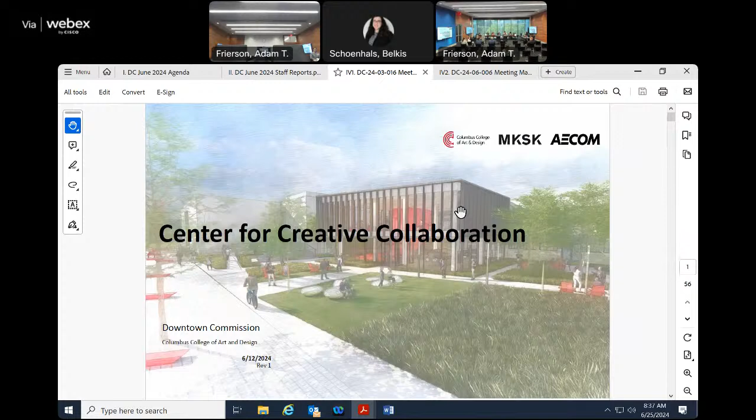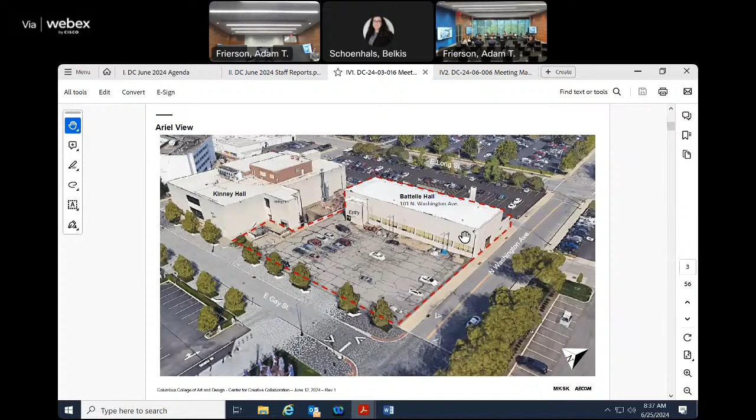And this is essentially what you all saw in March. We do have some new members here, so I'll orient everyone to the site and then I'll leave the applicant to go through the materials. But this is Battelle Hall here, and a parking lot to the south. So they're going to restore some of the exterior here, expose the windows that are behind here, and then add on the expansion, which we'll see.

This is the site again, and then you see here the building expansion and the footprint of the existing building, and then the gardens and other programming that will take place. And I'll leave that to the rest.

The downtown design guidelines state that downtown's built environment continue to be enhanced and energized with new buildings and additions to existing structures that promote good design, long-lasting building construction materials, and attention to detail, especially at the street level. The guidelines encourage adaptive reuse of existing buildings and recommend that new construction be influenced by the pattern of nearby contributing buildings. They also recommend high-quality materials, ground floor transparency, lighting that minimizes uplighting, and the inclusion of landscaping and plaza space. As such, the proposal is consistent with the recommendations of the downtown design guidelines.

Belkis, I'm going to recuse here. All right, thank you, Jen.

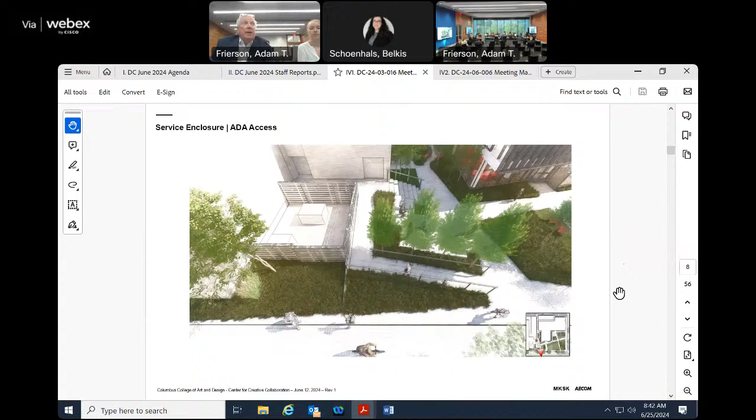You can see in this image the utility court next to Kinney Hall that we're screening off. That has periodic access—sliding gates to give access from Gay Street. That is the background for an accessible ramp, and also an outdoor gathering and study area that you can see better in this view.

Gay Street and the campus as a whole is top left of this image, looking to the west. This is outdoor gathering space for students, for instruction, for casual gathering, and it's exposed as well to Washington and Gay. It's important to us that we expose this entire facility, indoor and outdoor, the production of art and the collaboration of art, to the outside world. This is the edge of our campus.

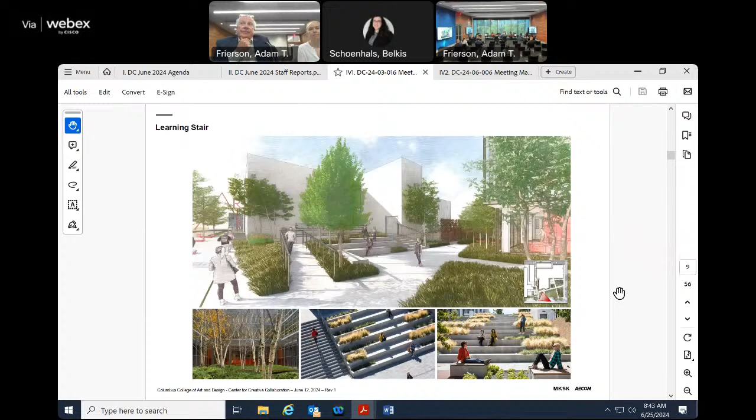A question - with the exception of the new entrance, is there anything being done to Kinney Hall facade wise, or is it just that? It's not on the exterior. Just that new pathway, got it.

This is an image of the connecting walk that runs north to south, leading from the body of the campus and this new yard space to the north, through what will be a future parking lot renovation and a transit stop on Long Street. Our students, faculty, and staff will be able to directly access the campus through this connective walkway, and there's also an opportunity for a small respite study space.

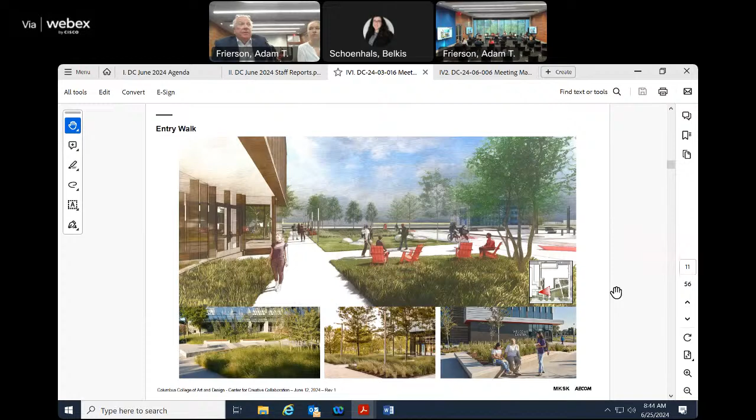This is the front yard of the building. Again, we're using a native plant palette. This is not meant to be unkept, but it's not meant to be a manicured landscape either. We want to make sure this is properly installed culturally.

This is virtually the only mown lawn in the whole project, and that's an extension of this outdoor gathering space where students and visitors can gather casually. The furnishings will be provided by the college as we finish the renovation work.

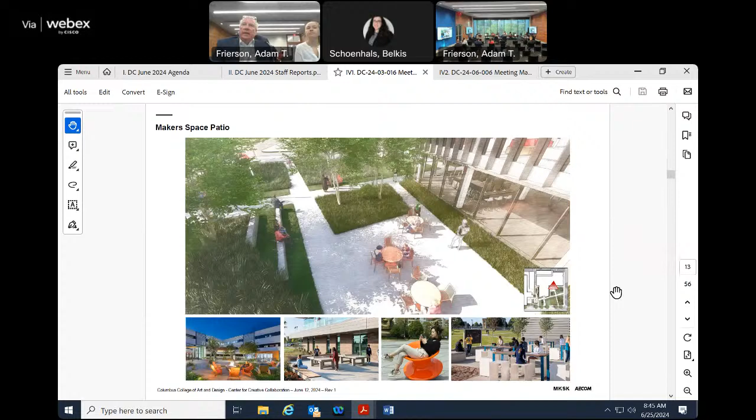And then this is the outdoor makerspace, as we call it - a casual collaboration gathering space for students. It's accessible, yet somewhat protected from Washington Avenue and passing automobiles. The whole intent is indoor function of the building, outdoor function of the facility, and it is truly indoor, outdoor, and exposed to the outside world.

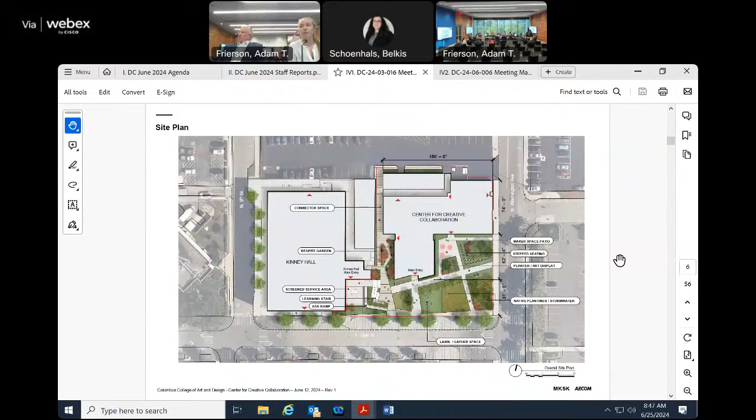We did do some destructive testing to explore the integrity of the open brick. It was determined to be cost prohibitive to really pull that off. We worked with our construction manager partner to do some destructive testing there, and given the state the brick was in, we realized that was probably why they covered it up.

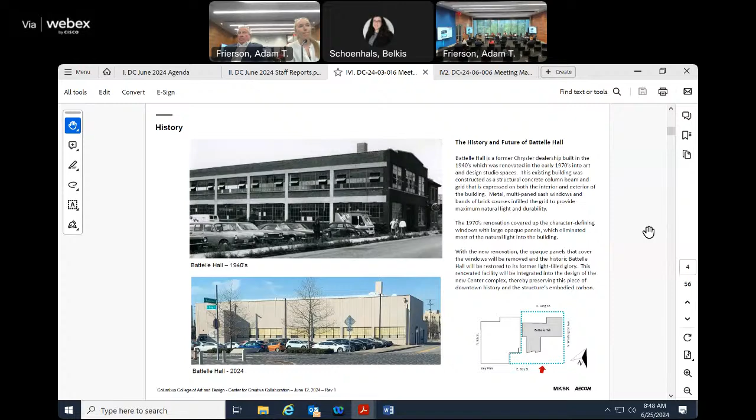So will it look like brick, or will you see the brick texture underneath, or will it end up a smooth surface? It'll be a smooth surface, similar to how it is today, a plaster finish.

So the intent is really to keep most of the plaster, which is in pretty good condition. There are some areas with degradation from water infiltration, so we'll repair those areas and put a new coating on. And what about the roof, will that be...?

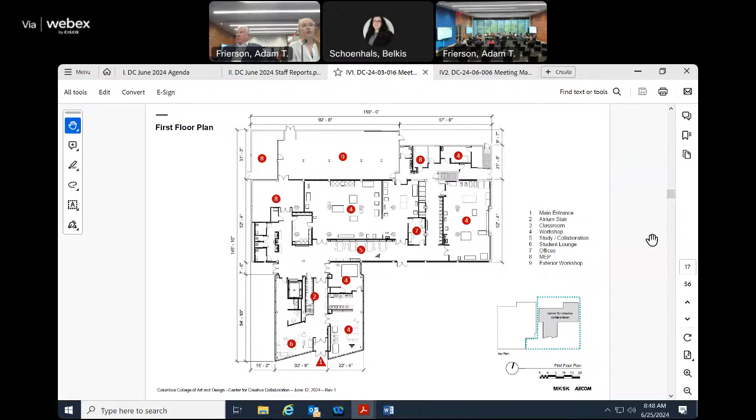I mean, you can't necessarily see it from the street. Will it be white? It's a white roof, yeah. It'll stay - it's an existing roof that's still under warranty, so we're keeping the existing roof in place and coordinating with the installer.

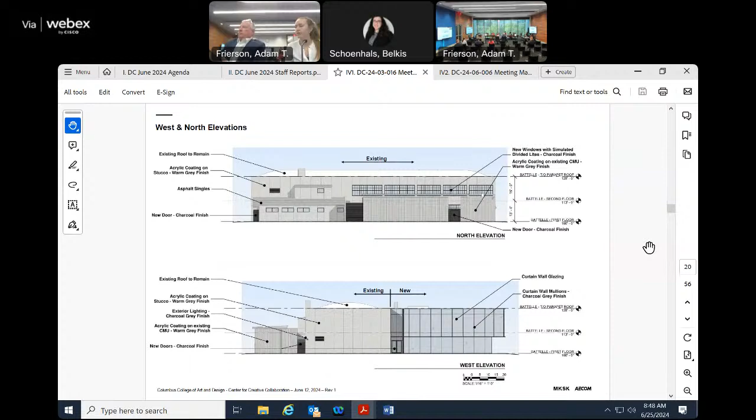Clear glass? Yes, it's called low-iron - essentially clear glass with a very minor tint to help improve performance and solar heat gain. Will that be on the new section as well as the old? Correct, all of it.

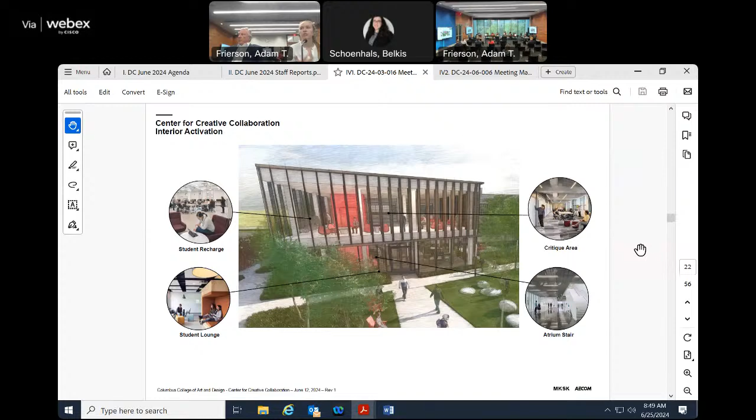If we could go to the renderings. So that will be on the curtain wall glazing - the charcoal finish is the same color of the mullions on the new addition as it will be for the existing building. All the doors will be aluminum storefront matching that same charcoal finish. A pretty simple material palette, really just working to integrate the new and the old while allowing some juxtaposition of the overall design and character.

I think the rest was just all the extra stuff. Okay, but Brian, can you give us a couple minutes on what the plant selection is? Sure, I want to find out which swamp there, so.

It's better known as the stormwater management area - I've been saying swale, but I appreciate your shortcut, Steve. The bottom of this basin is meant to be virtually a monoculture of grasses.

This is all nursery stock, but all native species in terms of origin. The largest trees we have are white spire birches, white bark birches. We've got small maple and sawtooth oak, given their environment. Those likely aren't going to be massive trees over time, but we're looking to create that soft ground cover feel, yet have some height to it.

So it isn't an ivy bed - it has some height, and it's hardy enough to go underwater as I mentioned before, but it's also hardy enough to withstand the drought conditions that those dry basins have once they dry out. That's really the tougher environment for plants - the dry basins by nature. Yeah, so those all do very well in terms of drought tolerance.

We want to lean toward environmental correctness in terms of hardiness zone and origin, where these plants ultimately come from in nature. People don't realize, but bald cypress is an Ohio native species. Yes, indeed, it's a beautiful tree - you don't see many of them.

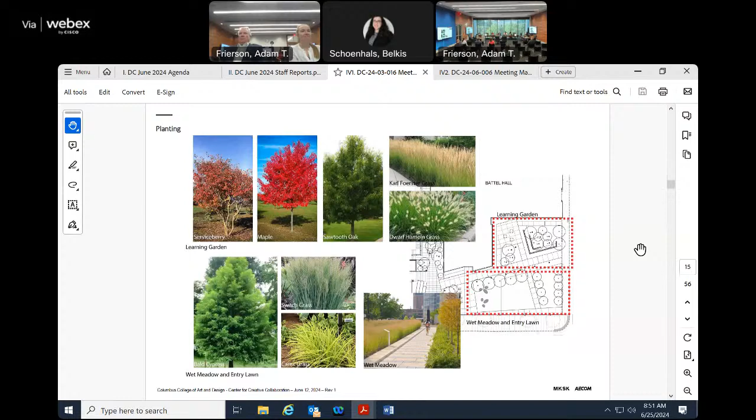I'm not trying to monopolize the conversation - anybody else have a question or comment? I have a couple of comments. I love what you've done, it's beautiful, and I just had a question.

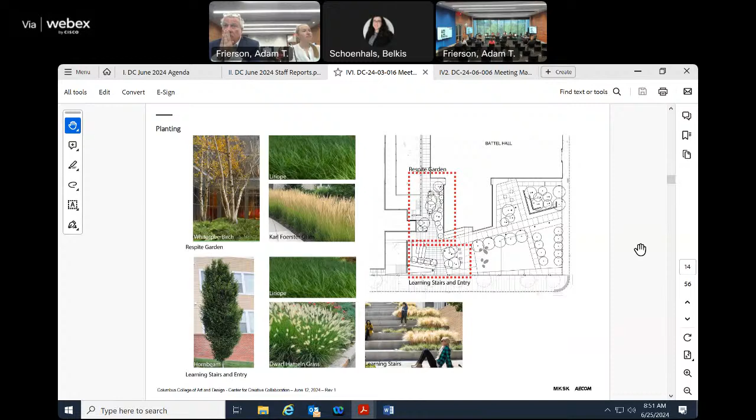The green space you're creating in the front - you talked about wanting a connection between the two. I'm wondering if you've thought about the winter months or when it's dark out. You're creating these nice sculptural site pieces that look like rocks for sitting - have you thought of lighting or other techniques so that when it's dark or gray out and you're not really using that space outside, it still seems activated and engaging?

Is the slide in here, Belkis, with some of the exterior lighting? Yeah, we do have a lighting slide, just after the planting slide I believe. There you go - Jane, great comment. We've got two large cluster columns which are meant to do that area lighting.

That may speak largely to your point, where we can aim those spots from a single pole on the seating area to the west, and also areas within that collaboration courtyard. So we can accent with aimed light on specific features - trees, furniture, hardscape, whatever we choose. But that's also meant to be area lighting for outdoor events, so those are adjustable and dimmable.

In the magenta color are a series of column lights which accentuate that crossing path that gets from the body of campus to the edge of campus. And then we also have low down lights which light that connecting walkway from Gay Street that goes to Long - about the north-south corridor.

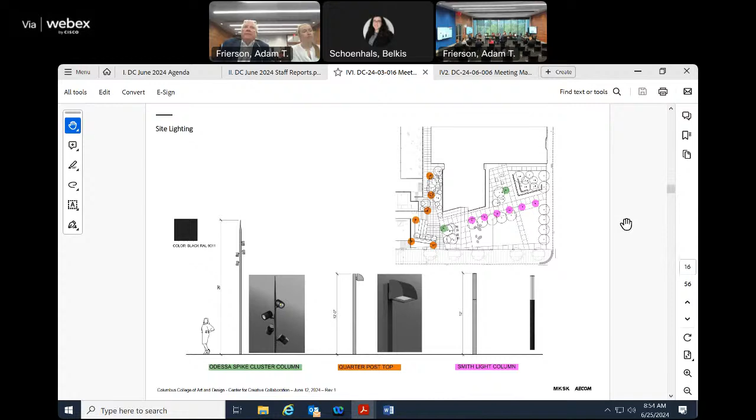That was the other question - as that corridor going north and south becomes narrower, do you have lighting there as well? We do. One of those images shows a green screen, which is a modestly elevated wall with the utility court behind it, and we're extending that with a green screen so that it's a comfortable and attractive walkway. It'll be lit further to the north. That all sounds good, thank you.

What's your pavement material, by the way? Cast in place concrete, buff wash and scored concrete, and probably light broom finish as well. Are there other questions? What's the pleasure of the group then, please?

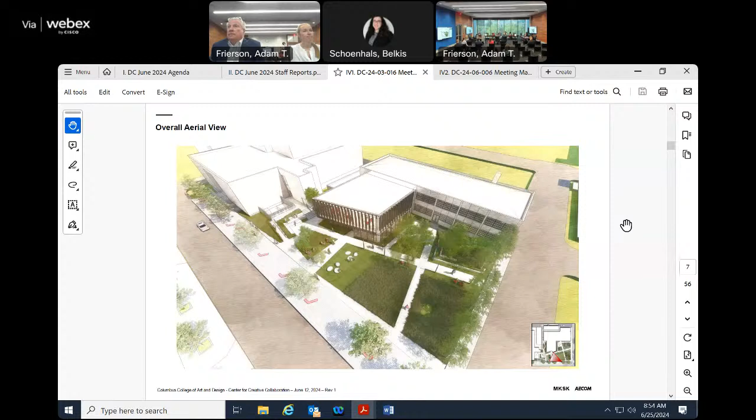Anyone want to make a motion to approve? Put it on the table? If no one has anything else, there was one more thing I wanted to. Okay, I'm sorry, go ahead.

I had touched on this a little at the last meeting, but on that eastern facade where you have what looks like a garage door or service door, it looks like Boone Street or Boone Alley terminates there. I'm wondering if you've thought about pedestrians or vehicles traveling west on that street, and whether that area could be designed somehow - maybe that garage door could be a different color, or the stucco finish on the existing building could have a change in texture or a subtle pattern - something so it doesn't just look like a back door, since it could be a prominent facade because of pedestrian traffic and its place on campus.

That's actually a great comment, and I think you may have read our minds. The campus is also planning to undertake an overall branding and wayfinding study. We've discussed this building and how the north side as well as the east side seem somewhat like the back door because of where the new addition is, but those facades are also very important. So the college has elected to defer any work on that as part of this project and incorporate it into the overall campus branding study, so they can take a comprehensive look at their whole portfolio and take an approach at that time. So yes, they were thinking exactly the same thing.

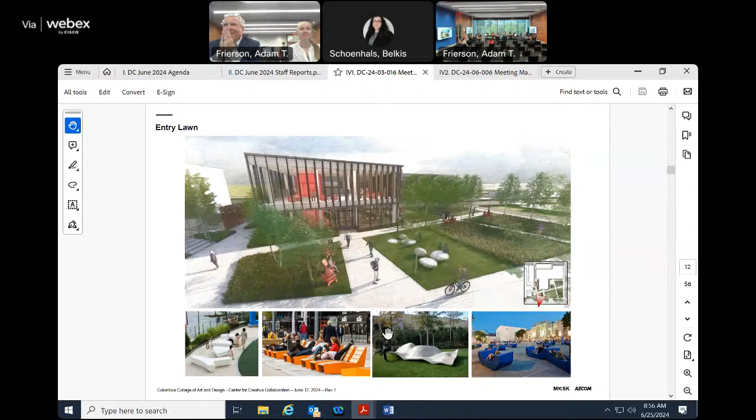I think the plaza design is great, a very strong design, and the material palette is lining up very nicely. I have a question about the building - I do like the storefront infill panels you described. Considering the southeast exposure with a lot of glazing, I see some vertical fins on there, and it's just a big open gathering space. What other considerations have you thought about for occupant comfort and solar exposure?

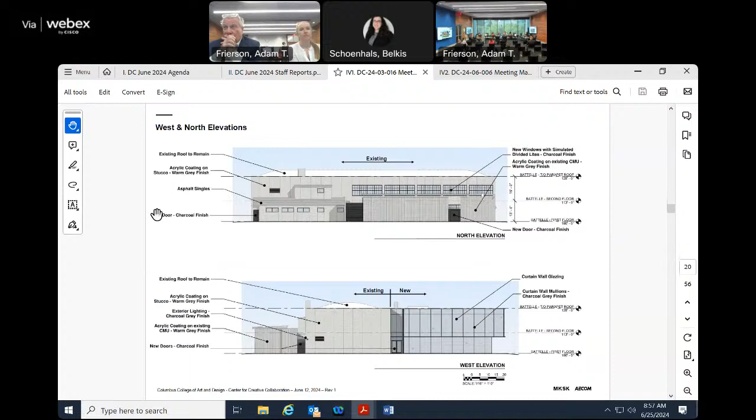We've worked to identify a high-performance glazing to enhance that facade. Some buildings on campus struggle with solar heat gain, so that's been a big focus of ours, as well as providing window coverings on the interior. We're continuing to explore the glazing to make sure we've properly addressed solar heat gain as well as glare.

Okay, other questions? Could I have a motion to approve, please? Motion to approve the project. Second. So there's a second from Autumn. Good, so the motion is on the floor. Any more questions or comments? Anything from the audience?

All those in favor, say aye. Aye. Motion carries. Thanks, it looks great.

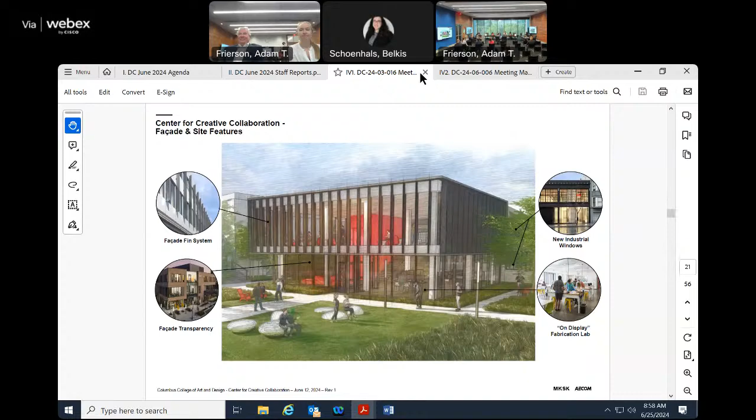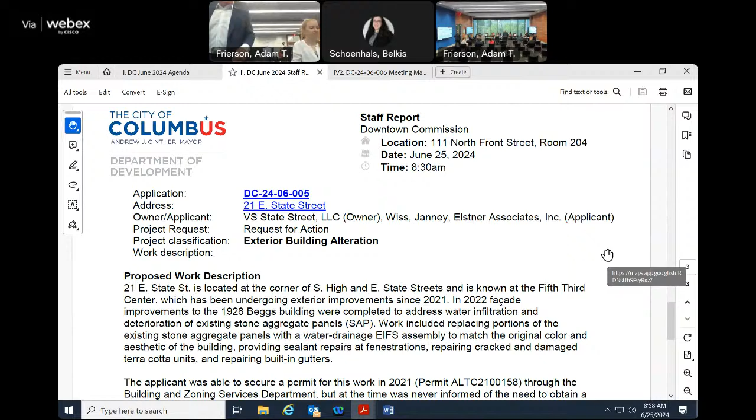This next case is for 21 East State Street, located at the corner of South High and East State Streets, known as the Fifth Third Center, which has been undergoing exterior improvements since 2021. In 2022, facade improvements to the 1928 Beggs building were completed to address water infiltration and deterioration of existing stone aggregate panels, otherwise known as SAP.

Work included replacing portions of the existing stone aggregate panels with a water drainage EIFS assembly to match the original color and aesthetic of the building, providing sealant repairs at fenestrations, repairing cracked and damaged terracotta units, and repairing built-in gutters.

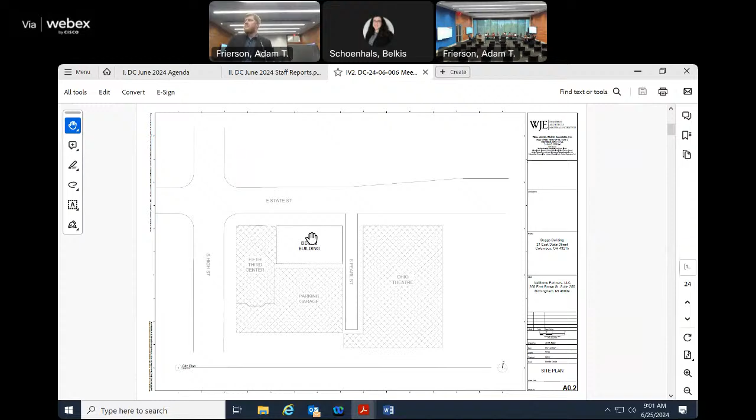So this is the corner of High and State. And the Beggs building, it's not the one on the corner, but it's just next to. That's the section that was built in 1928. And these are the floor plans, but what really applies here is the elevation, which I'll show you.

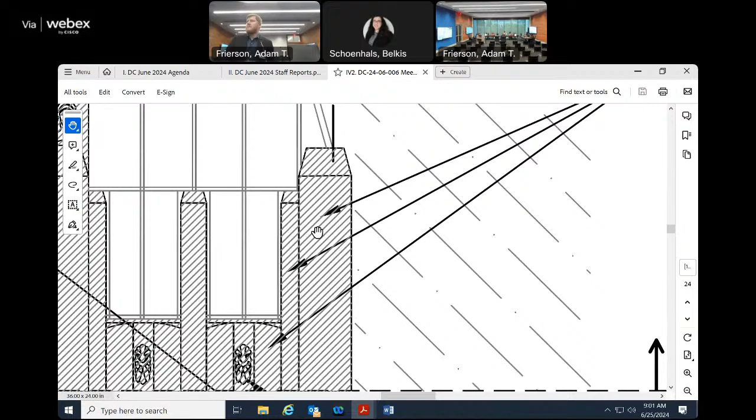So we have the base, the middle and the top. And if you zoom in to the top section, all this cross hatching, that's where the stone aggregate panels were. And that's what they took off and then put the EIFS on. So it's really just this tippy top portion where that work happened.

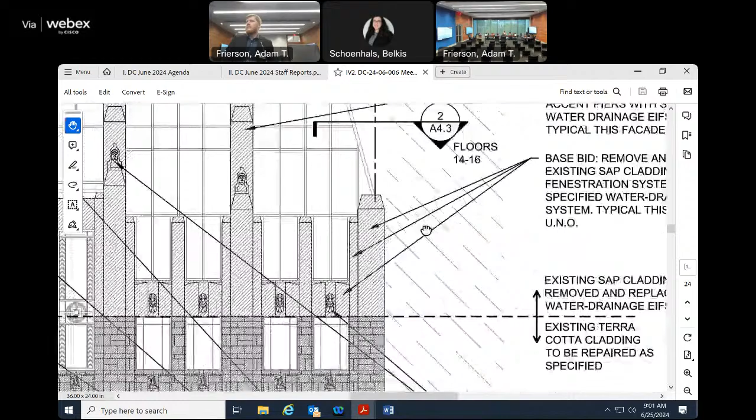And of course, beneath they did tuck pointing and did some restoration work for that water infiltration. But this is where that replacement happened. And again, this is done, it's sitting over there today. So in a way, this is sort of a retroactive approval for work that was already done. This is where it says, remove and replace existing SAP cladding and fenestration systems with specified water drainage system.

Well, because I have a question. So the terracotta part of the building, which is below that, is that the original 1928? I believe so, yes. I know some of it's been restored. Right, so they repaired that.

I'll tell you what, let's, if we can swear the applicant, maybe he can answer that question for us. Can we do that? I'm just going to finish up my report, second, and then we can ask that question.

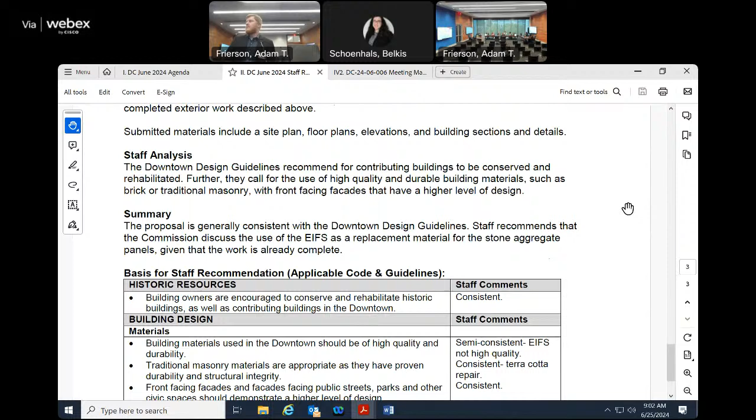With the analysis, the downtown design guidelines recommend for contributing buildings to be conserved and rehabilitated. Further, they call for the use of high quality and durable building materials such as brick or traditional masonry with front facing facades that have a higher level of design. As such, the proposal is generally consistent with the downtown design guidelines. Staff recommends that the commission discuss the use of EIFS as a replacement material for the stone aggregate panels, given that the work is already complete. Thank you.

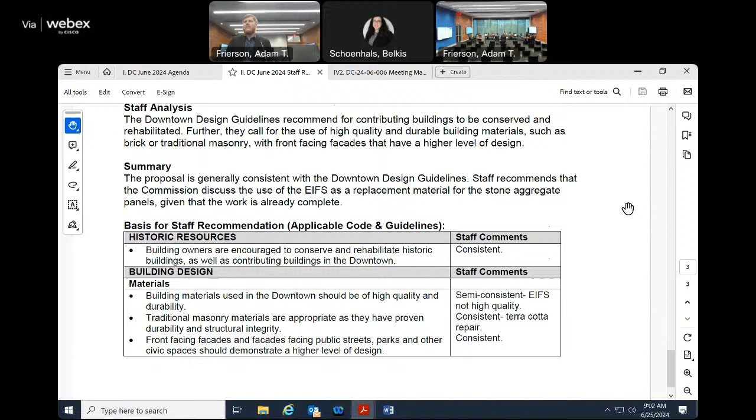Are you done then? Yes. Okay, and you're here for the applicant? I am, yes. Alan Hips with Wiss Janney Elstner. I'm sorry, did you say your name again? Alan Hips with Wiss Janney Elstner, who's a designer and enclosure professional that consulted on the job and did the construction documents. Okay, would you raise your right hand?

Do you swear and affirm that the testimony you're about to give is the truth, the whole truth, and nothing but the truth? Yes, I do. Thank you very much.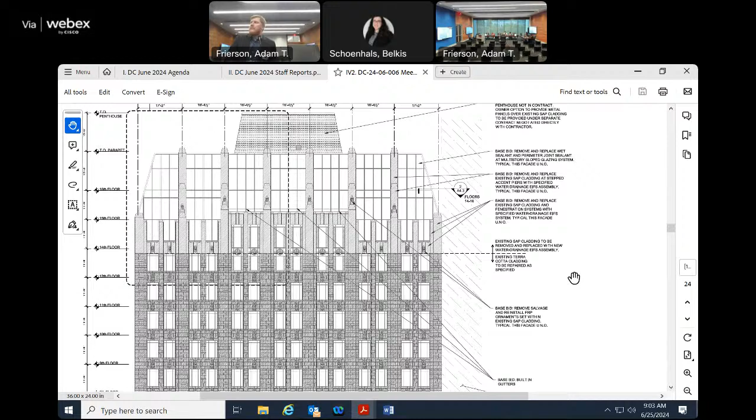Okay, there's a question, that's a good question. Fill us in on what's original and what got replaced, please, for a second. So the building was originally conceived in 1928, I believe is the date that you saw. That was the terracotta portion from, I believe it's the 13th or 14th floor down.

That dashed line is up there. Yes, okay. So from there down, that's original terracotta from the 1928 building, correct, and other stone components that make up the lower portion.

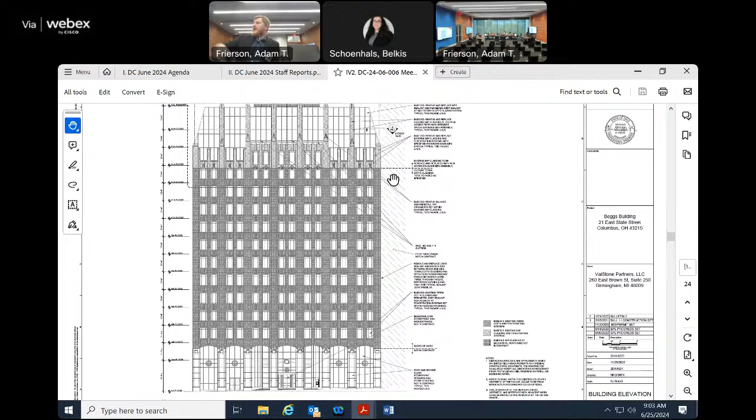That's the water table. If you go to the side elevation, they had added a bay in the 1990s when they did the upper addition. So if you see the original terracotta portion there on the east elevation, in the other drawing to the left, you have the multiple bays of terracotta. Those were restored. We did sealant replacements, tuck pointing, essentially tied back or replaced units that were deteriorated or needed replacing.

The SAP panel, stone aggregate panel, is kind of a rusticated, very thin panel that they used for cladding in the 90s addition, which was the bay and then everything above. That panel had deteriorated over time. It was contributing to a significant amount of water infiltration into the building. It was predominantly a single line of defense, about a half inch with a skim coat directly fastened to the structure of the building. We were brought in in 2019 to do an investigation.

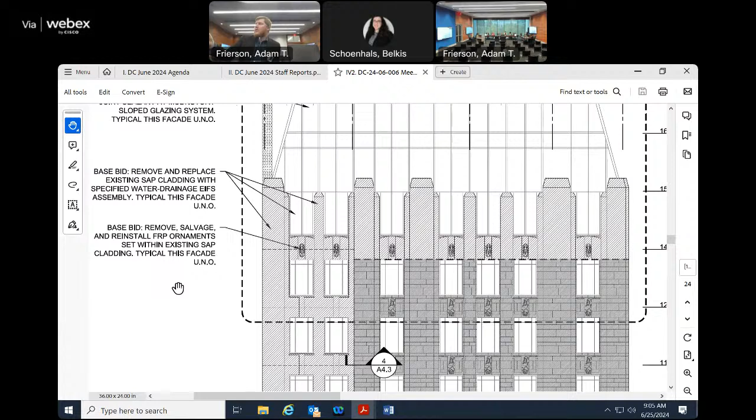That's how we usually get involved in work - if we've got a lot of water leaks, we want to retrofit the building and make it perform well. So we did a study and quite a few investigations on the cause of the infiltration. A lot of it was basically the interface of the SAP panel and the sloping curtain wall above with all the glazing, and then just the panels themselves had deteriorated, the base finish had fallen off.

Can I ask you, so the original 1928 building, that was all terracotta, and even the SAP that's on the top, was that originally terracotta too? No, it was not. The building stopped at essentially the roof of the 12th floor.

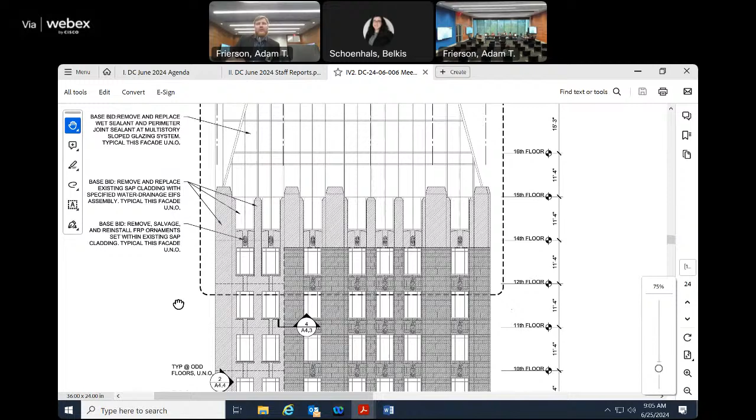Literally just stopped right there. So in the 90s, was that because they didn't finish it? That doesn't sound right. I believe they overbuilt a roof, so they removed the roofing material, used it as the floor, and then added the additional 3 floors in the 90s to gain that kind of penthouse balcony space. So that stuff in the hash area there, that was not part of the original building. No, it was not. It looks like something similar was there, but maybe it was different.

The entire construction type of the building is different. Do you have a picture of the old building by any chance? It was in the packet, I think there was a photo. That's what I was wondering. Do you have it in here? I thought I had seen one as well, so I'm just asking.

I don't recall that, no. So the difference between the drawings and what is there now is quite unremarkable in change. The profiles, the pediments, everything stays within the same kind of language, same shape. That was what led to the selection of our finished material that we used to overclad with - we could get essentially a thinner profile with high performance.

EIFS is what you used to do. Yeah, we used the drainage EIFS product. Anybody that's been around EIFS for an extended period of time knows the horror stories of it from the past. It was a barrier product, essentially a European product that was brought over here. It was installed incorrectly over our thin wood structures, leading to a lot of deterioration behind it. We no longer do that. We put a weather barrier behind it and then use the cladding as kind of a UV protection, bulk water shedding material.

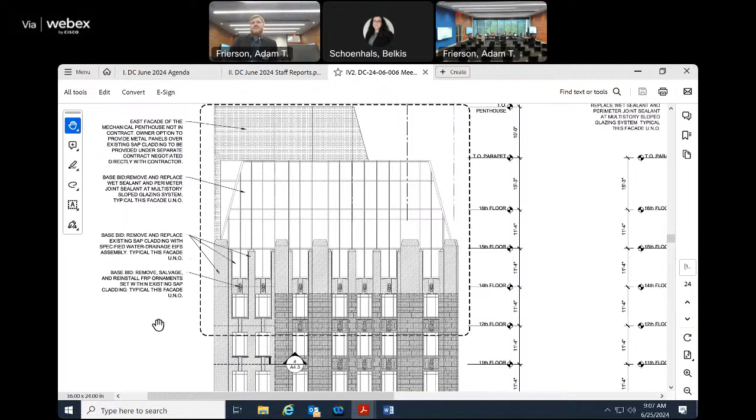Distinguish between the cladding and what I think I hear you saying is the EIFS, the regular EIFS then - so you use it as a cladding material? Correct. So a barrier EIFS system essentially uses... Barrier what system? Barrier EIFS, exterior insulation finish system. That's the EIFS? Yes, okay, EIFS is exterior insulation finish system.

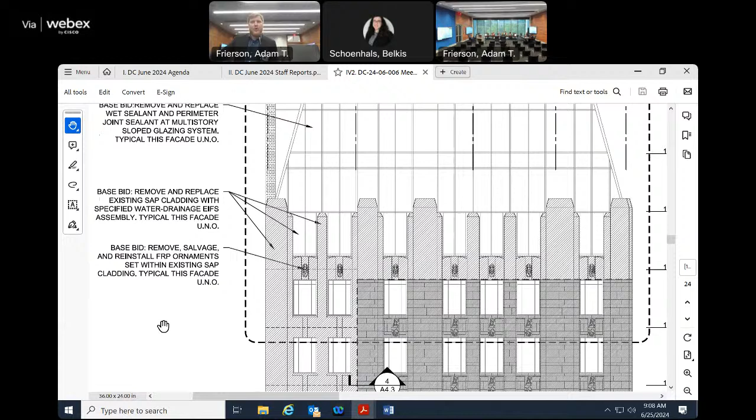So it's essentially a thickness of insulation that's applied to a building and then acrylic coatings applied over it to give you the finish and durability. Historically, that was just directly adhered or directly attached to structure behind with no backup barrier. So the insulation material was in effect a sheathing, and then you put this finish coat over it. Correct, which then gives your waterproofing, which is then subjected to environmental exposure. It's really not a very good system, you're saying? Correct.

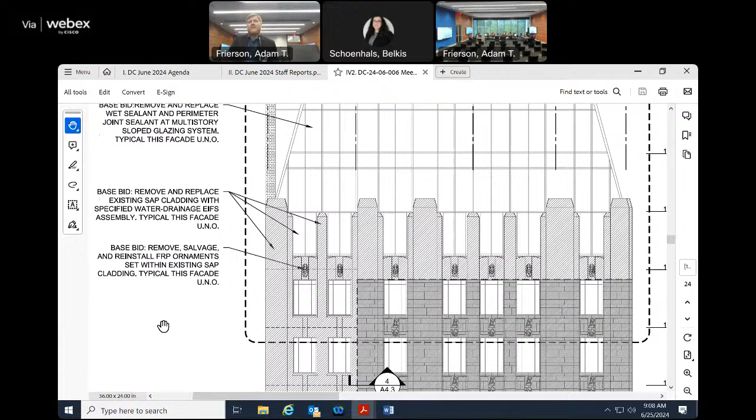In your packet, there's also a picture of the section of the EIFS system and the existing system, with demolition details alongside the new details.

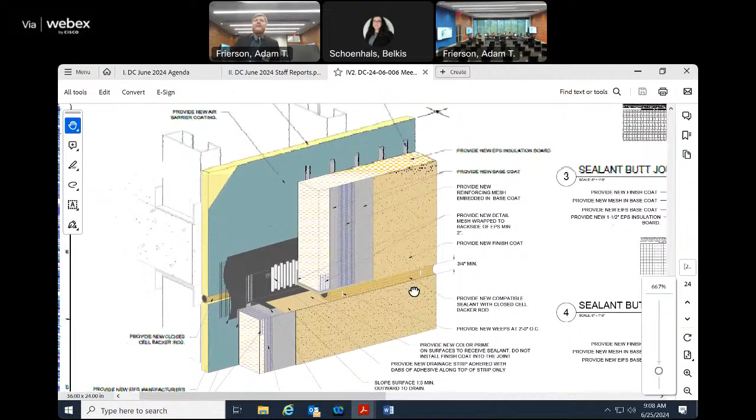So you replaced what was there, right? Correct, we removed the old stucco stuff and put the EIFS stuff in, just matching what was there. Predominantly, yes. There is an additional thickness to the insulation that was added, a minimum of 3/4 inch, but from the exterior view it's the same, a negligible change.

Okay, well you wouldn't get to see that. So the existing stucco was essentially the thickness of the sheathing that we put back, that yellow material there with the green that's cut back. Interesting, it was a 1/2 inch panel, just sealed and skimmed over, and the facer was falling off of it.

So we put back 5/8 inch dense glass exterior sheathing, a weather barrier that's part of the EIFS system. The vertical scores you see with the adhesive provide a drainage path behind, so any water that gets through the exterior layer can drain out. It provides a watertight system at the level of the green, and protects it from thermal and UV exposure on the exterior.

In our design study, we considered a direct applied finish system, which would essentially just be the outer coating on the sheathing. But that doesn't provide the redundancy the owner was looking for. They wanted a system that was essentially a watershed plus a backup system, so they wouldn't have the water infiltration they'd been experiencing.

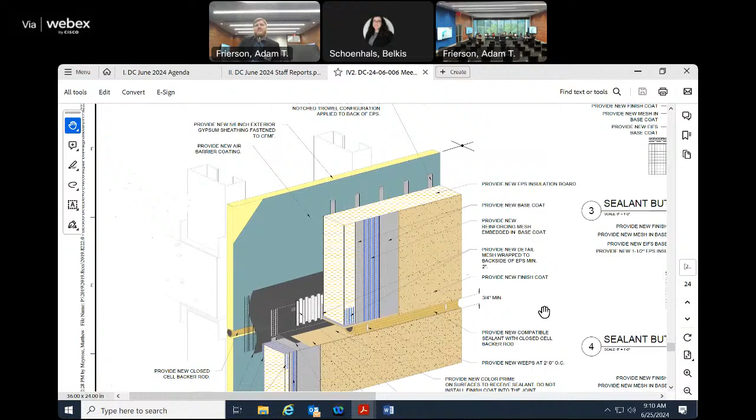Okay, now let's spend some time talking about the design of the thing. We really want it to be structurally well done, and one of our criteria is that we use high quality materials. By the way, the EIFS doesn't tend to fall into that category for the downtown district.

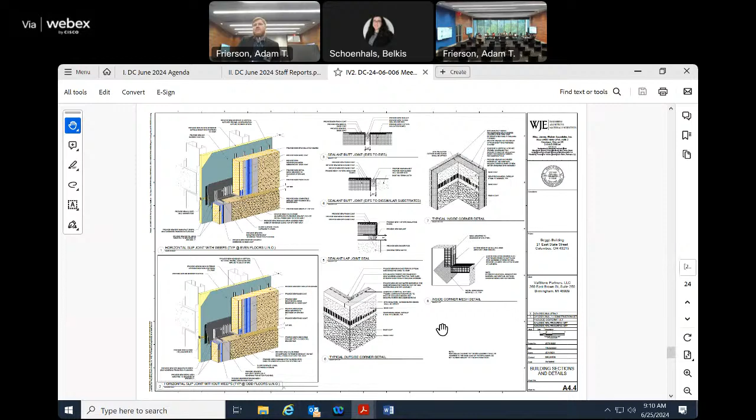But if you could talk to us a little bit, I see medallions on there, I see forms and shapes. Is that supposed to mimic what was there? Is that the idea? And how, what are those medallions made of?

So the medallions were FRP, a fiberglass kind of form that was removed, preserved, and then reapplied. All of the heads and medallions were put back on as part of the project. The forms and shapes of the undulation of the facade were recreated in the EIFS using either different thicknesses of foam or additional framing or sheathing.

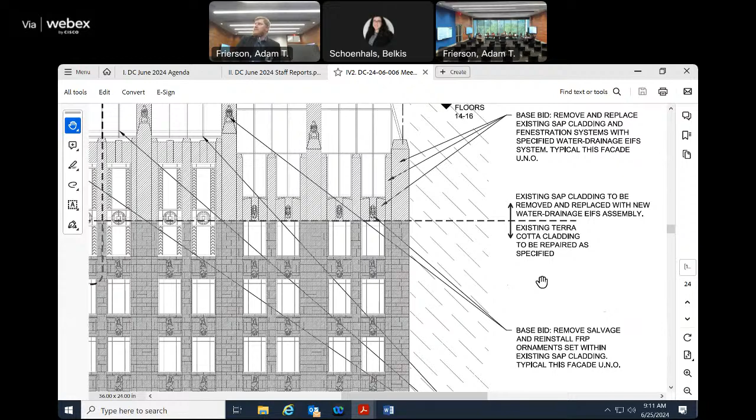And the heads, did you make those too and match those? The heads up top were not EIFS, those were again a fiberglass product that was reattached. Looking at a before and after photo, which we didn't put in the presentation, there's negligible change from a passerby's view. The only thing we might have gained is a 3/4 inch shadow line between the terracotta and the EIFS system above.

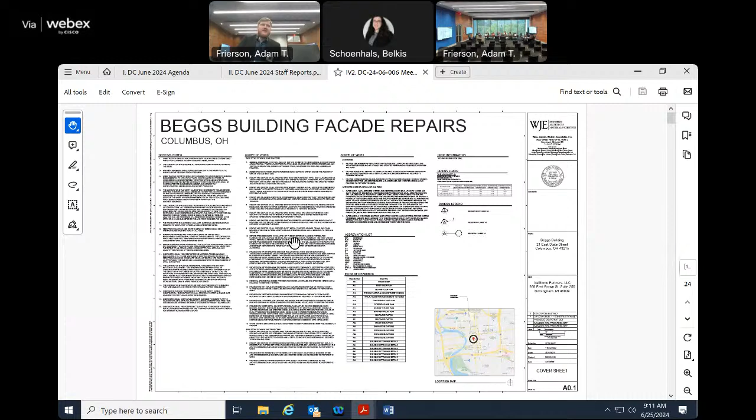So that was to get that additional build up. So, knowing what you know about EIFS today, the original EIFS brought over from Europe that was used, and the new product, what would you describe as the previous life cycle of that product versus the new one? Meaning, how many years is the old product going to last versus how many years will the new product last? The face material of the old product would last as long as the face material of this one.

The problem with the old system was that it would deteriorate the backup system, it would rot the sheathing and then fall off. This system, you're looking at probably 40 to 60 years before you need a retouch or recoat. The product is rather repairable, and the color way we chose to match the existing is a paler tan that doesn't bleach out in the sun.

I know a lot of people think EIFS fades. That's usually when you use a bright blue or very vibrant color, but when you pick a muted, more appealing color for city infrastructure, that color stays.

Got it. So barring any physical damage to the thing itself, like a dent or piercing of the surface, do you think the life cycle of the materials is 40 to 60 years? That would be conservative, it would be 40, because there's no impact at that height. The birds aren't going to be hitting it hard enough, and hail is a negligible issue for it.

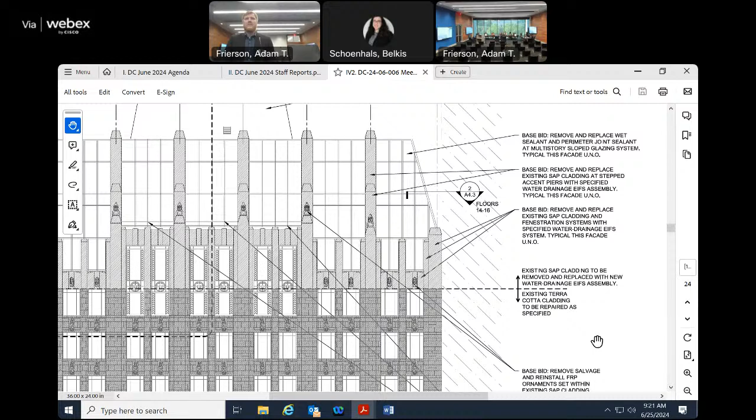Any other questions? It looks like on some of the side elevations you're using a lot more of the material. Here we're showing it just on the top portion, but I saw on some of the sides there's more. Yes, that's the east side that comes down to grade, the full replacement of the SAP that was done in the addition. That's basically kind of a hidden side, correct, between the State Theater there.

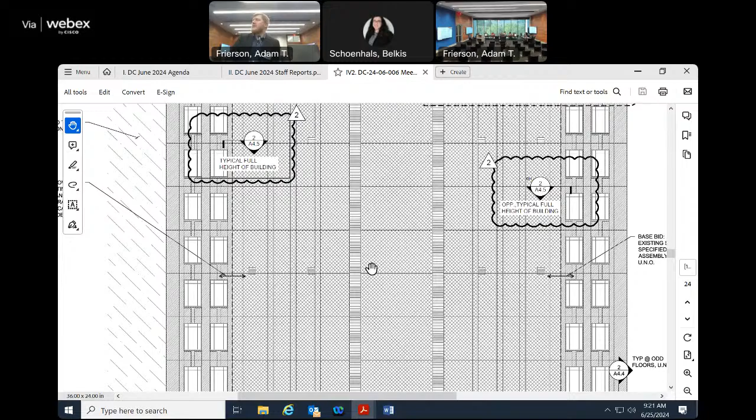On the other elevations, can you show the extent of the EIFS? That was only done at the openings on, I believe this is the south, which faces a parking garage. The parking garage comes up to about the 5th floor, but the EIFS is only done at the fenestration openings; the SAP remained in the middle. There were no leak concerns at that location, so we left the material.

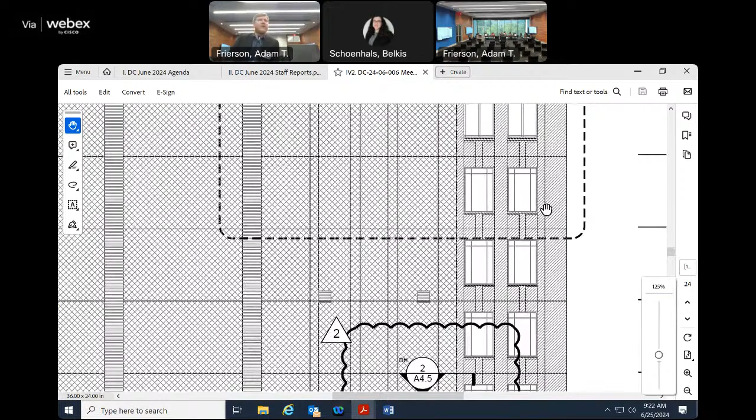So on this facade, where is the EIFS? Just on the sides where the two windows are. And going all the way down? One hits a roof at about the second floor level, one that's tucked into a corner of the building. This elevation shows the whole building standing out in space. There's a parking garage to about the fourth floor, and then the Fifth Third building wraps around the portion that would be to screen left.

When you're using it in larger expanses, are you creating score lines? How is that applied, is it a panel? Every other floor has the drainage outlet for the system, and at every floor line there's a movement joint—a through flashing at alternating floors and a sealed joint to allow for interstory movement within the system. That would be a line that was there in the SAP originally.

It was a line that they had revealed as a sealant joint, so any line that we put in was directly intended to match what was there in the SAP. So it looks panelized.

How does that look, because you're going to have the joints? Yeah, so we did the more ornamental areas. That's done with either a buildup of material, additional insulation thickness, or there were some undulations in the framing and sheathing behind it that we directly reflected.

And then the last question I have is, do you anticipate more of the SAP having to be replaced in the future? We don't, based on our study.

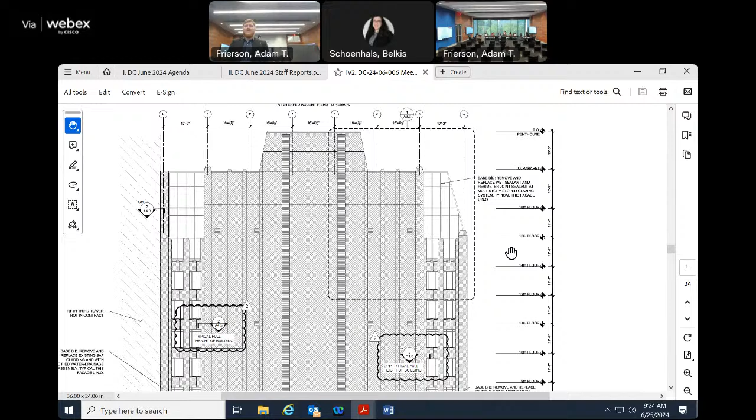I don't like going down that road necessarily, although in this case I think our applicant has been pretty well grilled here about the material and the process, and I think it was frankly very carefully done. So from my standpoint, I'm inclined to just move forward with this thing. I don't know if anybody has a different thought, and I don't want to cut anybody off if there are more questions.

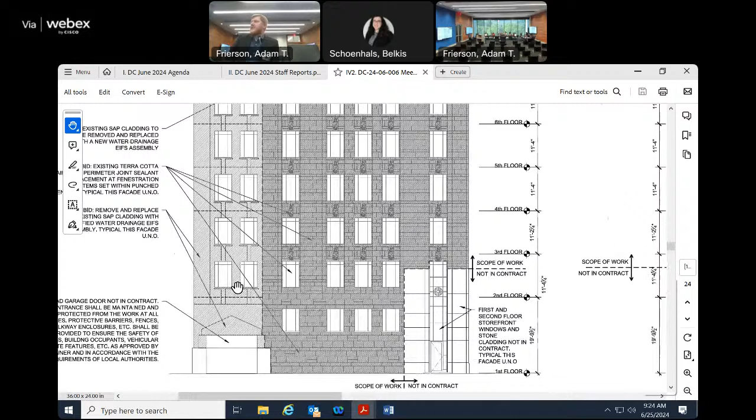Well, only one other. Okay, go ahead. It looks like where you're using the EIFS more extensively, that's stopping on the fourth floor. You don't have any situations where it's going all the way down to the ground level, or maybe a few, the south side. This area is the closest it comes. There's a drive-in area for the lower parking, and there's kind of heavy sandstone buttresses there, so you're down maybe 6 to 8 feet off the ground. But what you're showing, that condition is the only area where it comes that low. Yes, that's about our head height that we get to with the EIFS.

Okay, thanks. And I know we usually challenge the use of this material, but I think the application, the details are well attended to, and it's cost effective for the product, and the weight, yeah, at this scale.

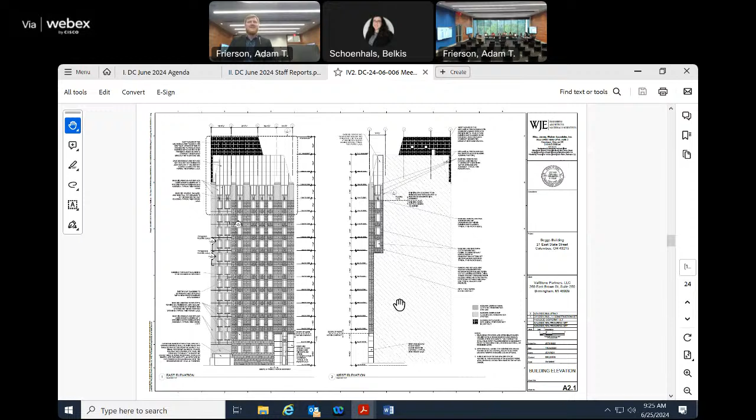Questions, comments, anything from the audience? What's the pleasure of the group, please? Motion to approve. Okay, there's a motion to approve. Is there a second? Second. Okay, we'll put it on the floor. Any other questions, comments? Hearing none, all those in favor say aye.

Aye. Those opposed? Okay, thank you for coming back in. And I guess this makes you official, so appreciate it. Thank you, thanks, I'll be in touch. Okay, thank you, anything else? Good rest of your day. Yeah, thanks, you too. Anything else for us, Bill?

Oh, we have to approve the staff approvals for the record. Any questions about any of these staff approvals on here? Hearing none, is there a motion to approve these staff approvals, please? Motion to approve. Thank you, Jenna. Second, thank you. Questions, comments? All those in favor? Aye. Those opposed? Okay, very good.

I did have a comment for Belkis. I don't know if anybody else has this problem, I couldn't read these applications. I got them, they're so small, shrinking a sheet this big. Now, I realize all you architects here, of which I am not one, are you able to, on your device, look at this? On my computer, are you able to enlarge it? No, I can't enlarge it. So you're not able to touch on it and then?